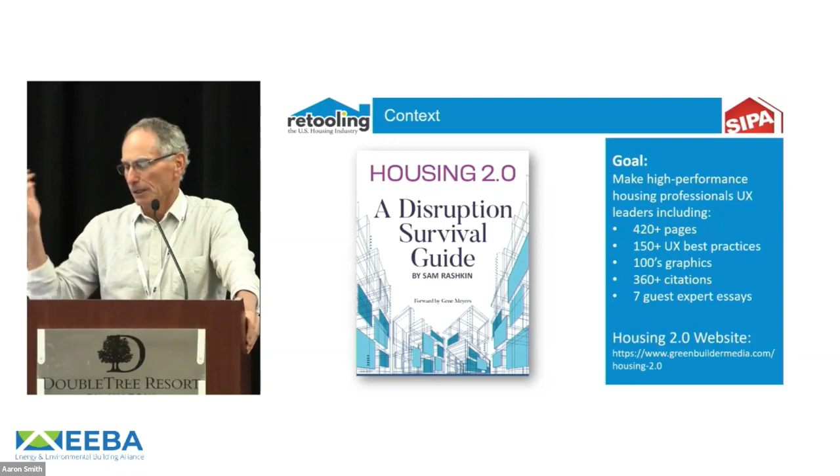It's over 400 pages. It's got hundreds of graphics. The first book I wrote had 60 citations. This one has over 360. It's a lot of research, and it's a lot of guidance on how to do high performance better, for less cost.

So the outline of what we're going to cover is we'll look at the power of innovation. Innovation is transformative, done right. And then we'll look at high performance home enclosure innovation and suggest maybe it's time to rethink it. Then we'll look at the next part, the challenge, getting that high performance home enclosure innovation to the market. It's great that it's better, but there's still some unique challenges you have.

And then how we're attempting to look at it with structural insulated panels to communicate that innovation at the point of bidding to a builder in a more effective way of translating the value. And Jack's going to give you the state of the SIPs address about all the new and amazing things they've done to make SIPs more accessible. So that's what we're doing. And let's start with the power of innovation.

And I always like showing these slides because they're so effective at showing innovation absolutely in front of your eyes in a way that it's hard to show. So you had two forms of personal transportation at the turn of the century, 1900s. You could either use a horse and buggy, or you can use this newfangled thing called the automobile. And if you want to know which one won out at the time, just look at a picture of New York City, 1903, Easter Day Parade, Fifth Avenue.

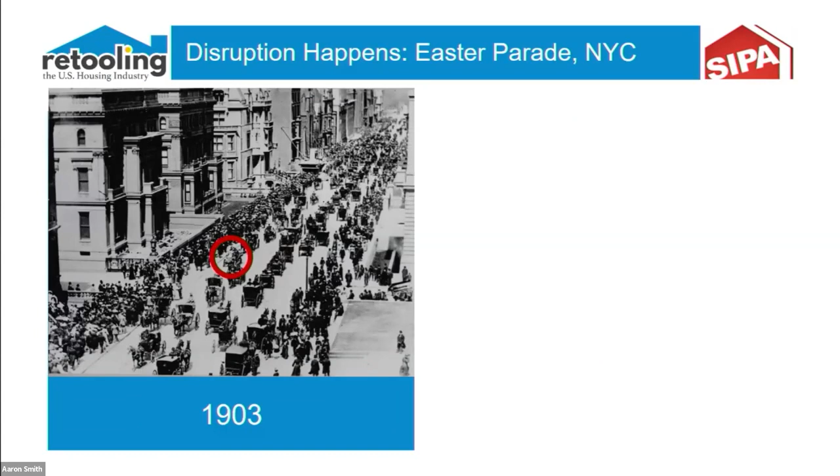And the Where's Waldo question is, where's the automobile in a sea of horse and buggies? And I'll highlight it for you right there. And so it was clear that for some reason, even though you had two options, the predominant, almost singular option that was chosen by consumers of transportation were horse and buggies.

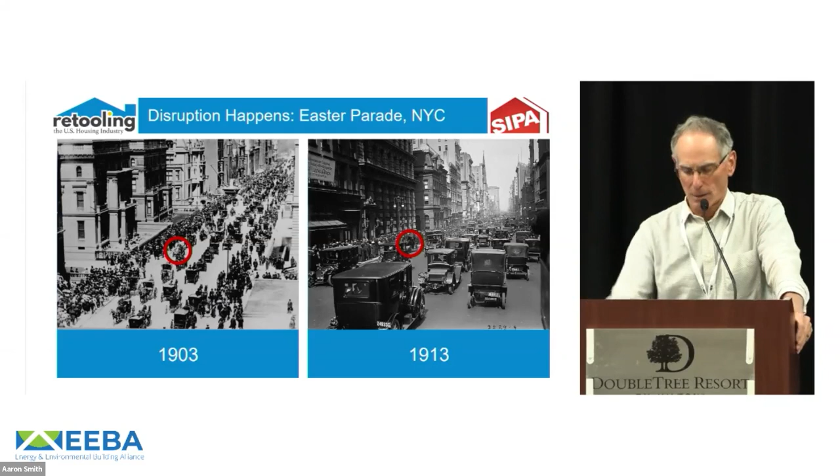Fast forward 10 years, 1913, Fifth Avenue, Easter Day Parade, the exact same street, a picture 10 years later, and you flip the question to where in the sea of automobiles is the horse and buggy? Right there, and everything changed. And why did it change? Two conditions are in play.

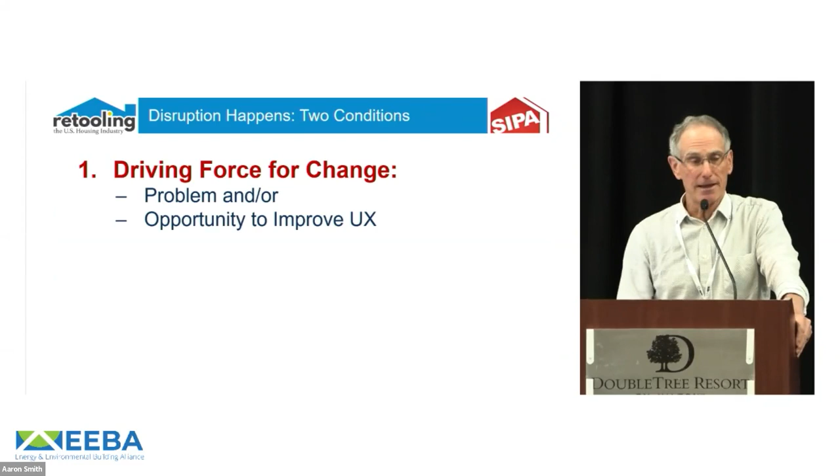First is you have a driving force for change. It's either a problem that needs to be solved and or an opportunity to really transform user experience. And then the second thing you need, here's where the innovation comes in. You have an innovation that's a solution to the problem and or this amazing new user experience. Something like that happens, and it happens on steroids when the problem transitions to become a crisis.

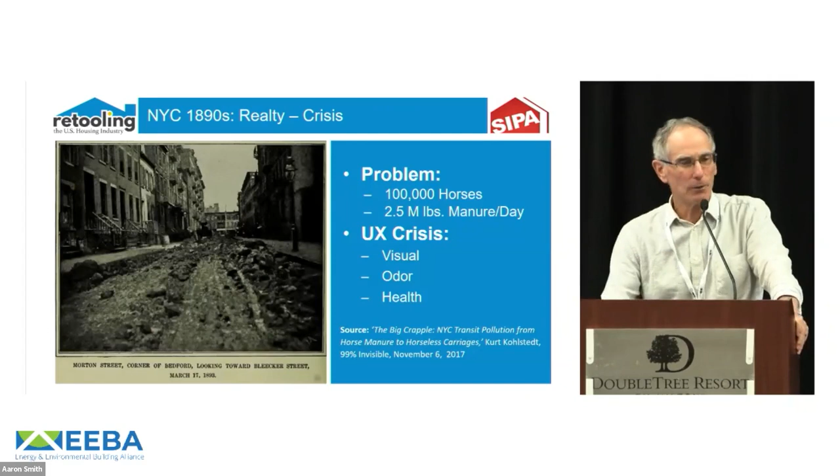This is actually what was going on virtually in all big cities in Europe and all big cities in the US. You had a massive crisis, an environmental crisis of the time. In New York City's case, the problem was you had 100,000 plus horses producing over 2.5 million pounds of manure, probably the same amount of piss as well. It was just a nightmare. And you see this image from one of the newspapers at the time. And the result was living in cities was a horrid experience, visually, odor, and epidemic health issues that were going on. And so, clearly something needed to be done.

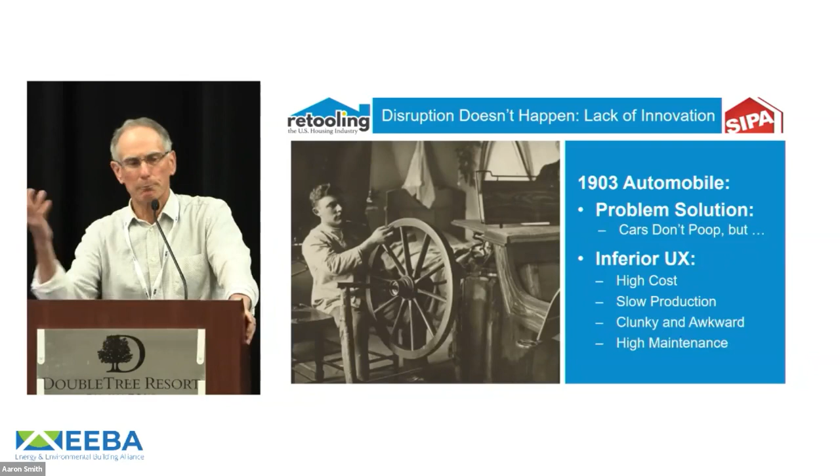Unfortunately, the alternative at the time, the 1903 automobile, sure, the automobile doesn't poop. We got that covered, but the user experience was horrible. It was really high cost for cars. They were cobbled together in a back room somewhere where a single person would put together the parts, and it was slow, clunky to use and awkward to drive, really high maintenance. If a part failed, good luck trying to get it fixed. It wasn't ready for prime time.

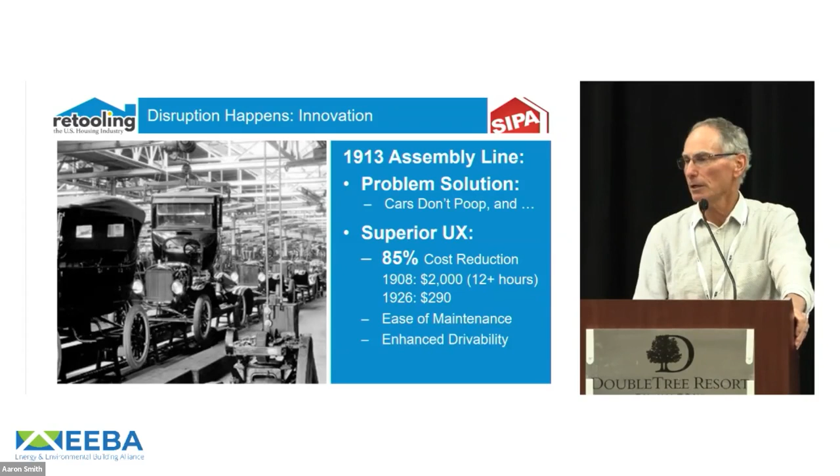And you all know what happened by 1913, the assembly line kicked in. That was the innovation that makes it happen. And so, yes, cars don't poop, and cost dropped 85%. The maintenance with all the standard parts and all the infrastructure to provide the services that you need, the enhanced drivability with a completely engineered, mass customized solution. In fact, you can get any color you wanted as long as it's black, right? There you go. We completely transformed the market.

So my key point about innovation is if you wait too long, if you don't adapt, you're left behind. So think of all the poor veterinarians and horse caregivers who were just left out of work. All the horse exchanges no longer had any business. All the horse and buggy companies that completely had to shut down. All the stock feed companies that lost business, the stables, the horseshoeing and jobbing businesses, and then the poor workers who were running around the streets cleaning up the mess.

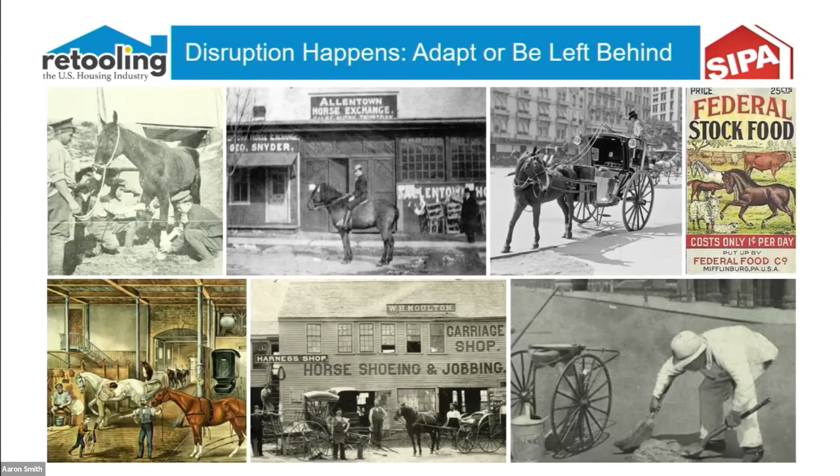All those peoples were disrupted. And that was only part of the disruption, right? All the services around all those businesses, whatever shops and other services tied to it, all of that suffered if you didn't see this coming. And now we know we have the next disruption going to happen, right?

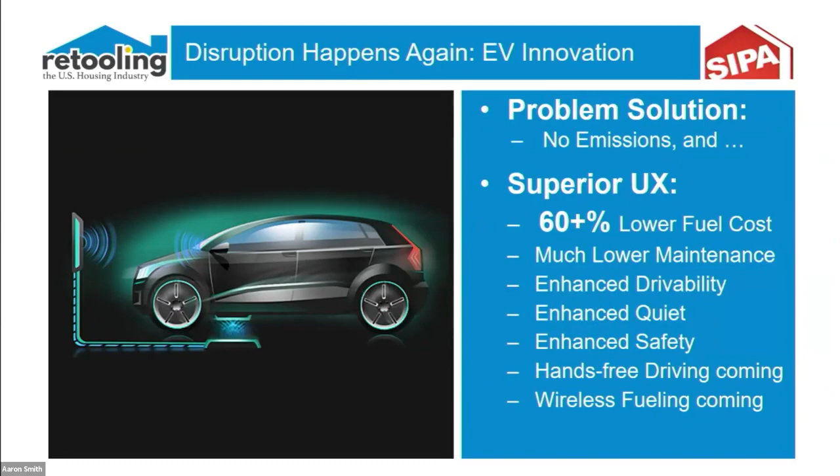Because now the new issue with cars is they emit carbon dioxide and emissions. And now we have a solution. Electric vehicles don't have emissions, and they have this incredible user experience, 60% lower cost for fuel, much lower maintenance, amazing drivability. Like they're on rails when you have those batteries all the way low and centered. Driving those cars is a completely different experience. The acceleration, the quiet, the safety.

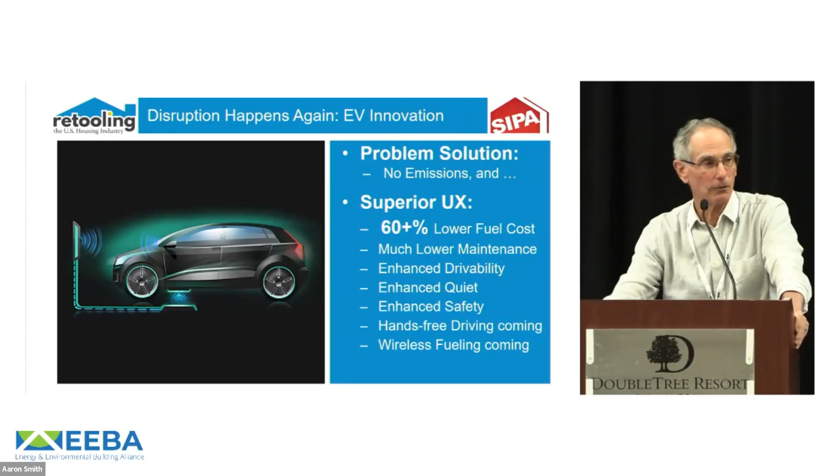The self-driving cars are coming. And then very quickly, we're going to see wireless charging. Just drive right over the charger, much the way your cell phone goes into a wireless charger. Amazing, better experience. But of course, in the future, we're going to have to worry about landfill and all the batteries that come from these millions and millions of cars. But that's what happens. Things disrupt when you have a solution to the problem and an innovation that addresses the problem and improves the experience.

So I'm going to suggest disruption is going to come to housing. And over the next 3 to 5 years, you're going to see some amazing changes. The reason I asked how many people raised their hand for who were here at the last session, Danielle and Jesse Younger, and what they're doing with this project with DigiBuild, Lago Place near Austin on Lake Travis. That's the whole shooting match. No, that's everything we're pointing to. It's going to address all these crises.

There are 5 crises that are just hammering the housing industry. It's the lack of user experience readiness. It's the affordability, productivity, the lack of being digitized. It's going to address all these crises that are converging by applying all these new innovations. It is an absolutely user experience optimized community. It's an absolutely user experience optimized house. It has fully optimized performance. It is fully digitized. It's mass customized.

If you're not relating to some of these terms, you really need to go back and watch the recording about that project. That's the future. And so as a result, when I connect dots, I make this prediction that's the future with certainty. Okay, so now I'm going to suggest in this room, I want to focus on the enclosure. I think that has to transform as well.

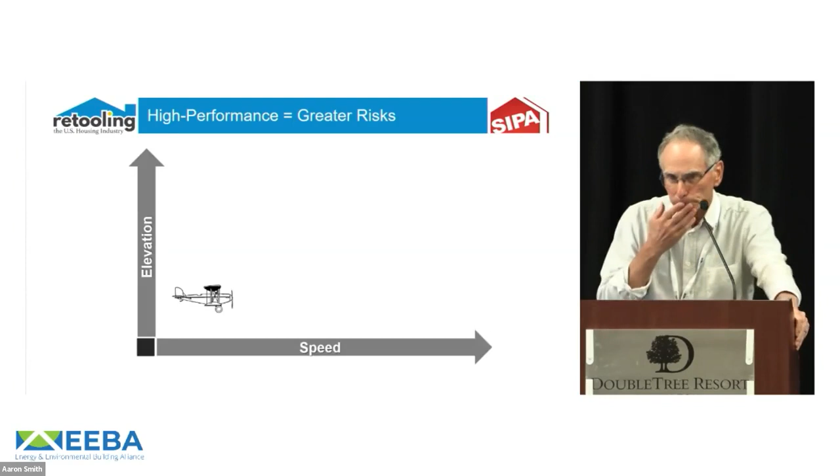It's just amazing. So what I want to bring to bear to understand the value of going to innovation is to understand from a building science perspective, all the risk we manage when we go to high performance enclosures. Risk comes along for the ride anytime we ratchet up performance for any product. When you make it higher performing, usually there are a whole associated set of risks that you have to manage.

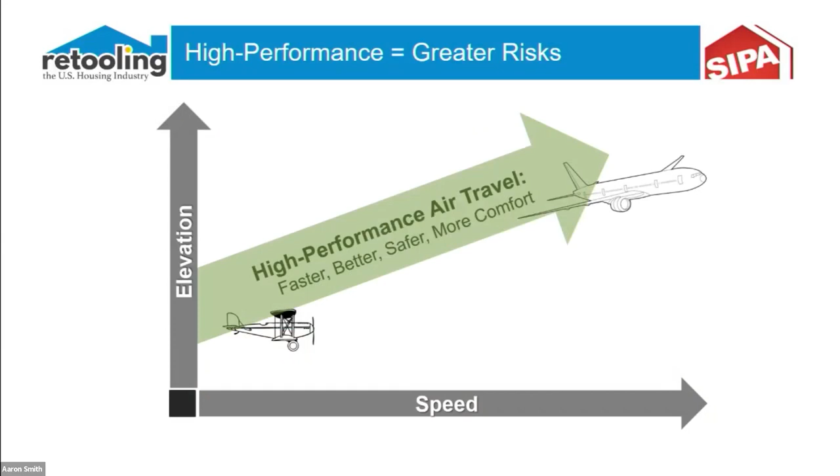By example, I can show you that when we started with airplanes and they had open cockpits, they flew at low elevation, which is the vertical axis, and very low speeds, which is the horizontal axis. And then we said we want to make them higher performing. So you look at new modern jet transportation, it flies at 35, 40,000 feet above elevation. It flies at 500 miles per hour. So we added all this performance that makes them faster, better, and more comfort, but we took on amazing risks.

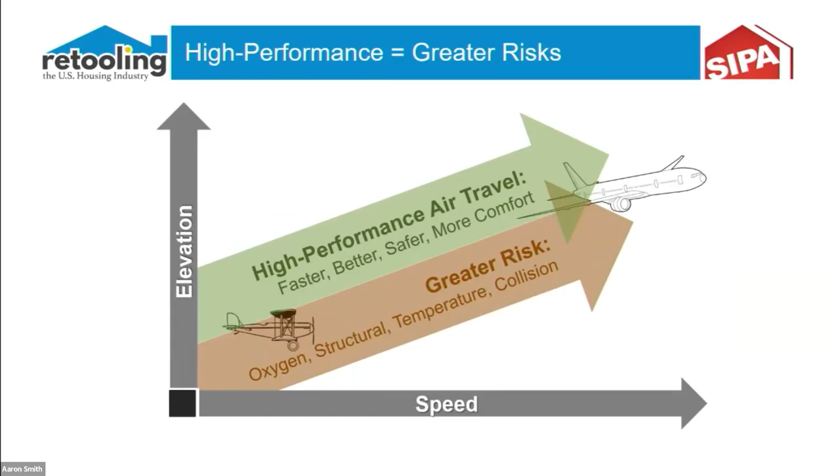We had almost no oxygen at 35,000 feet. So we don't not fly at 35,000 feet, we manage the risk. We have pressurized cabins and oxygen masks and so forth. We have 150 mile per hour winds and turbulence, so we build stronger frames and lighter frames. We have minus 70 degree Fahrenheit temperatures at 35,000 feet, so we have much more insulated enclosures for the cabins, and we have much more risk of collision with thousands and thousands of planes flying around at 500 miles per hour. So we have radar detection, collision avoidance, all these automated controls.

We manage the risk for high performance air travel. I forget the number. I just researched the number of airplane accidents in the last 20 years or so, and it's like 1/400th of what car transportation are in terms of number of deaths per mile traveled. It's just a stunningly safe form of travel. We can manage risk. That's why we do it.

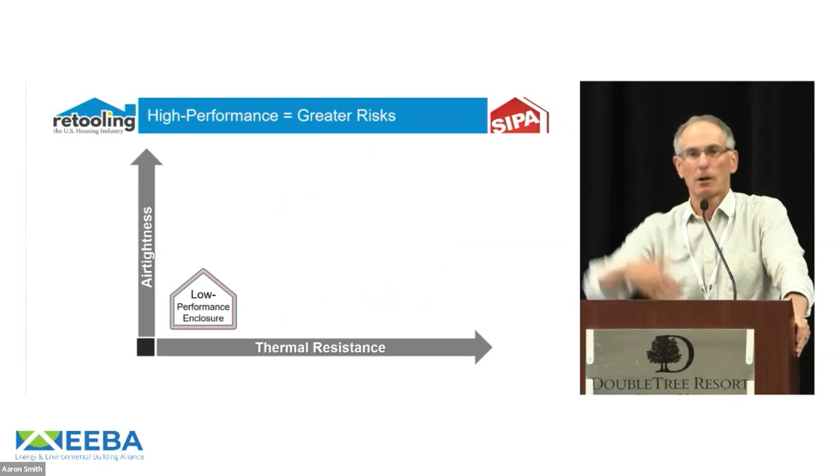So what about high performance enclosures? So a low performance enclosure, the axis vertical and horizontal change, the air tightness on the vertical and the thermal resistance on the horizontal. So when we have a low performance enclosure, we have low air tightness or high air leakage, and we have low thermal protection.

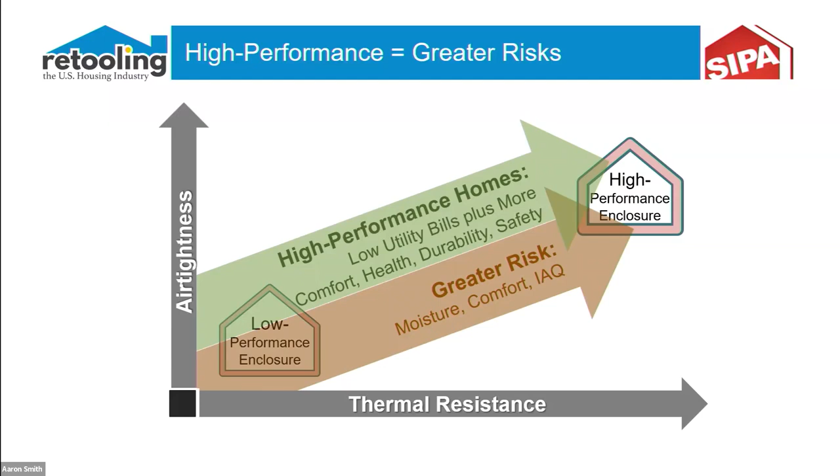But of course, we're going to go to high performance enclosures, right? Low bills, more comfort, health, durability, and safety. It would be insane not to do a high performance enclosure. But we have greater risk when it comes to moisture, comfort, and indoor air quality. So we do not avoid high performance enclosures. What we do is we manage the risk. So let's look at why the risk happens, what we do to manage it.

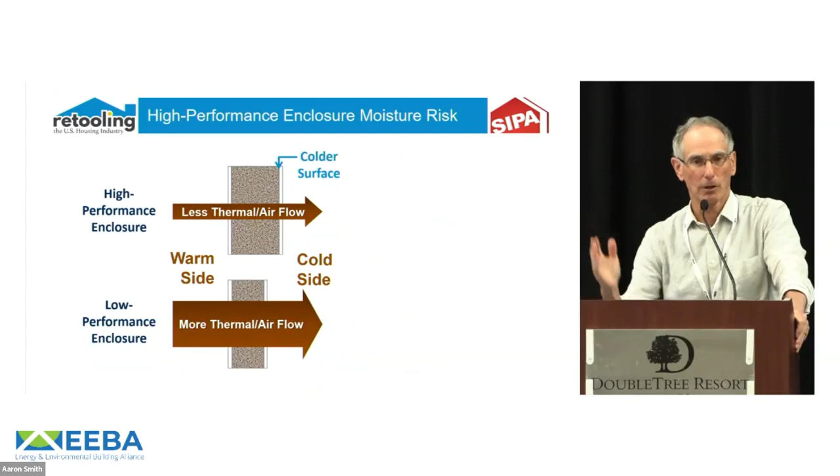So if it's a low performance enclosure, basically we have a lot of airflow and thermal flow going through the enclosure. If it's high performance, the one on the top, we have a tremendously reduced amount of airflow and thermal flow going through the enclosure. What that means is we have a much colder surface on the inside of the cavity on the cold side of the assembly. That's just logic, right? We're stopping the thermal flow from getting to it, it's much colder. We're stopping the warm air that leaks through from getting to it, it's much colder.

So look at the risk. We have more wetting potential. That surface now is going to condensate much more quickly because it's much lower temperature, and we have less drying potential because we have less thermal energy getting through the assembly that can dry it out if it gets wet. We're doomed in a high performance enclosure if moisture can get in. It cannot dry anywhere near the way a low performance enclosure used to.

The reason we can't retrofit 80 million existing homes by throwing in wall insulation is now we're creating a cold surface when we do not have the control layers to manage the moisture flow. And we'd be adding tremendous risk just by blowing the insulation in an existing home. We can do this in new homes because we can manage the risk, we can do our control layers. So that's what we do.

We do the building science control layers. We do HVAC best practices to ensure that we're not having air leakage in ducts that can create problems, and we're managing humidity indoors better. And we have ventilation to dilute humidity indoors as well. So we just know how to manage the risk, and then of course we do it.

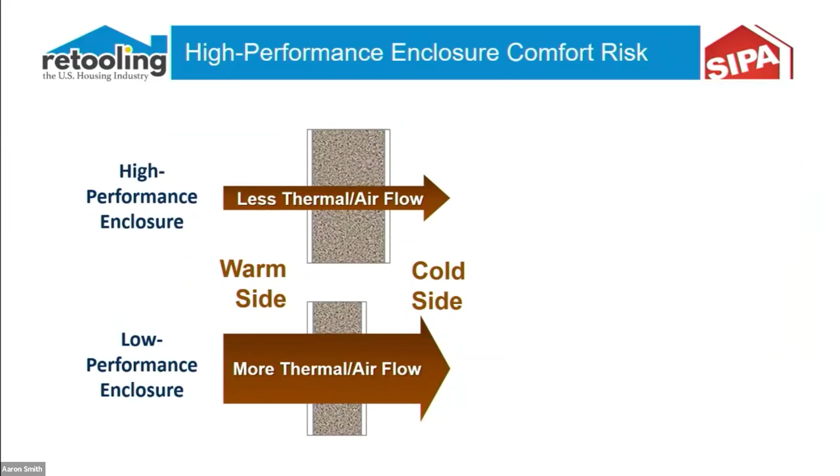The same thing when it comes to comfort, we have to realize that we have this new reality in high performance enclosures. They have ultra low heating and cooling loads, incredibly low, a tiny fraction of what they used to be. And therefore we have more risk. The risk comes from the fact we have less airflow going through the comfort system, right? The ducts have much less airflow. We hardly engineer the ducts with diligence. The industry just doesn't really spend nearly enough diligence on the duct design.

We have shorter cycles to get to the cooling when the loads are so small. So the cooling coils are not getting cold enough, long enough, the way they used to, to remove as much moisture. So what are we going to do about the latent load? And further with the latent load, we have these swing seasons that are so much longer on the front end and the back end when we don't have sensible cooling, but we still have humidity loads that require latent load to be managed. All this additional risk in a high performance enclosure.

So what do we do? We do variable speed systems that can throttle down more effectively. We do HVAC best practices where we have quality installation. We have ducts that are actually designed properly and have the right airflow and get the comfort to the room, even if it's a small amount of airflow. We have new innovations like plug and play ducts. We have dehumidification now as a must-have. It's not an extra credit any longer.

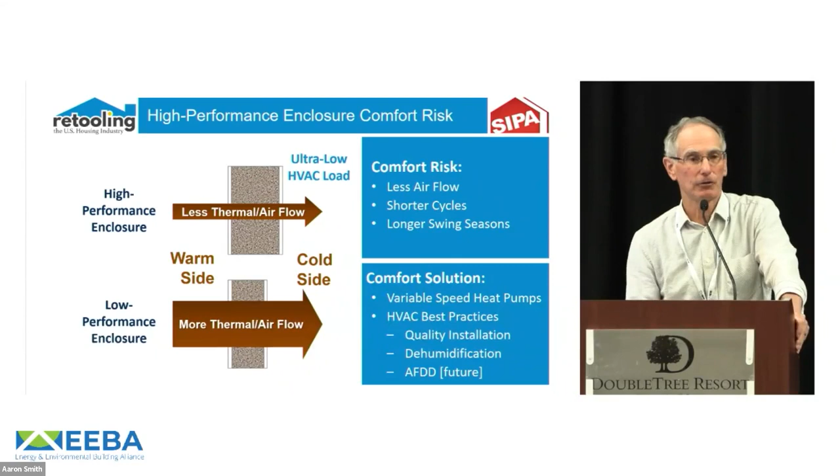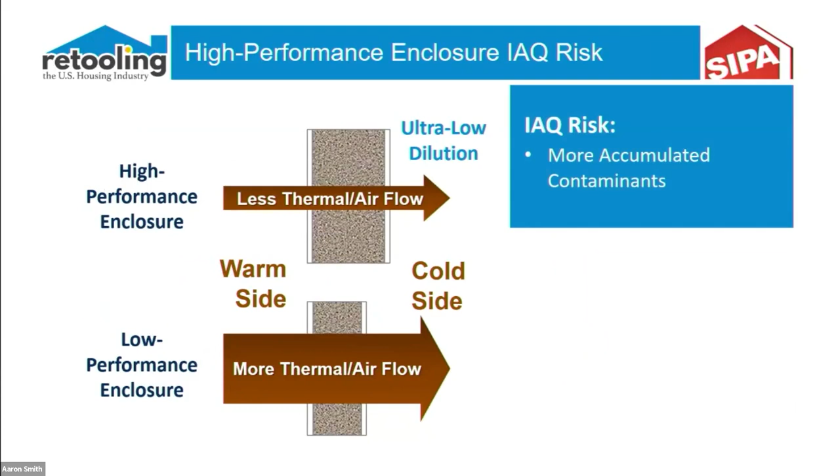And in the future, we'll have automated fault detection and diagnostics so we can manage and get ahead of any issues that may be happening with the HVAC system. Then on the IAQ side, we have this ultra low dilution since we have so much less air leakage. So that means we have greater risk with the contaminants that accumulate from all the ones we bring in, whether it's the furnishings that have fire retardant chemicals, whatever chemicals are involved in building materials, carpets that accumulate dust, the moisture that's generated indoors, cooking, cleaning, washing. We have all these contaminants, so we have to manage them.

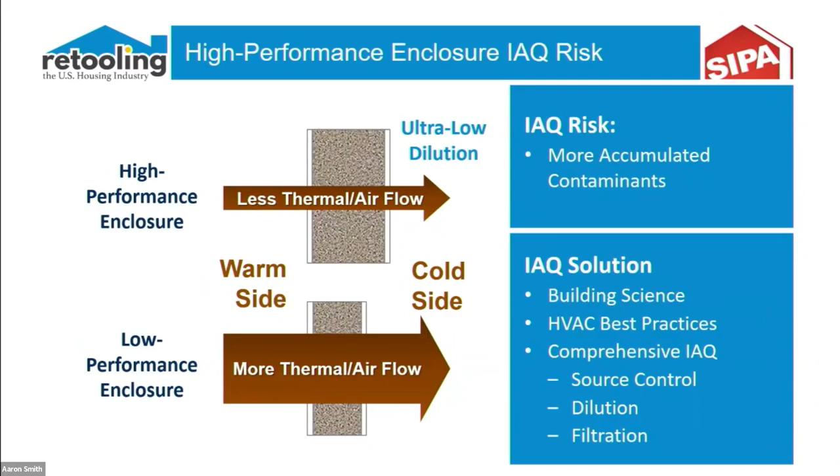We do comprehensive building science again to control the airflow that will introduce external contaminants like pollen, dust, humidity. We have HVAC best practices to ensure that the ducts are airtight and can't introduce contaminants into our home. And we have comprehensive indoor air quality like Indoor airPLUS that has source control, dilution, which is ventilation, spot and whole house, and filtration. We manage the risk.

Okay, and then future ready. By the way, when we do all this we have homes that are ultra durable. They should last for hundreds of years versus much shorter times. So we should manage the risk that they will stand the test of time, that they're future ready. And therefore we have to realize that we have much more propensity for disasters. The frequency and the magnitude of disasters we're watching every year is mind-blowing. I think we had six 1,000-year rainstorms in a 6-week period this year. We have to recalibrate what is a 1,000-year rainstorm, right? Don't we? We have much more.

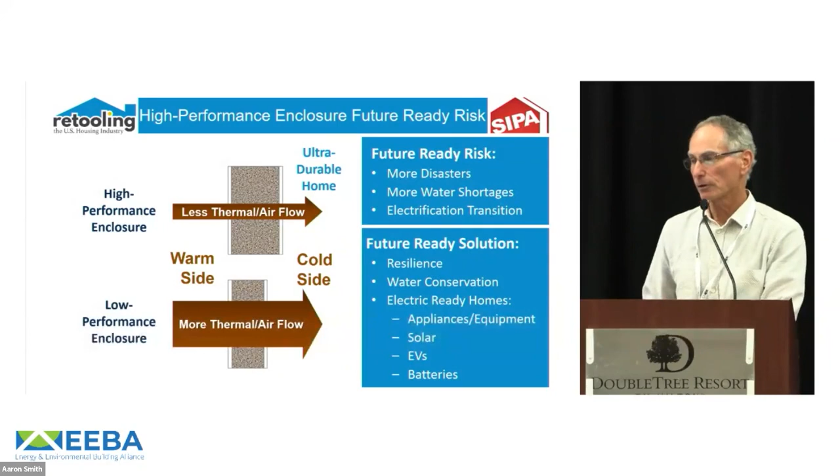The water shortages are historic. You know, we've been hearing about Lake Mead and just the whole western region of the country. What are they going to do about water? And we know that we're going to all electrification. We've heard that many times today. So we manage that risk by integrating resilience, both pre and post events, and water conservation in drought-prevailing locations.

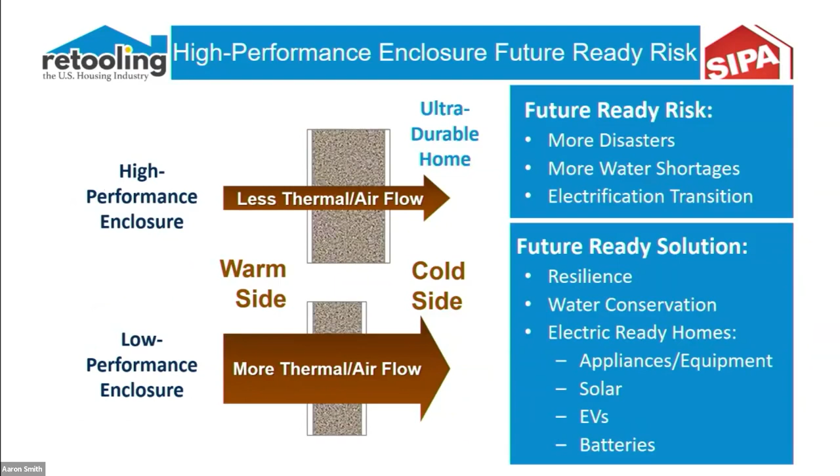And we think about electric ready homes. You know, we have solutions if we do include fossil fuel appliances or equipment, where we have the electric connection ready to go. Solar ready is already part of Zero Ready Home. Electric vehicle level 2 chargers and battery ready solutions where we can bifurcate loads that are critical, have the switches and so forth. All this we know we need to do.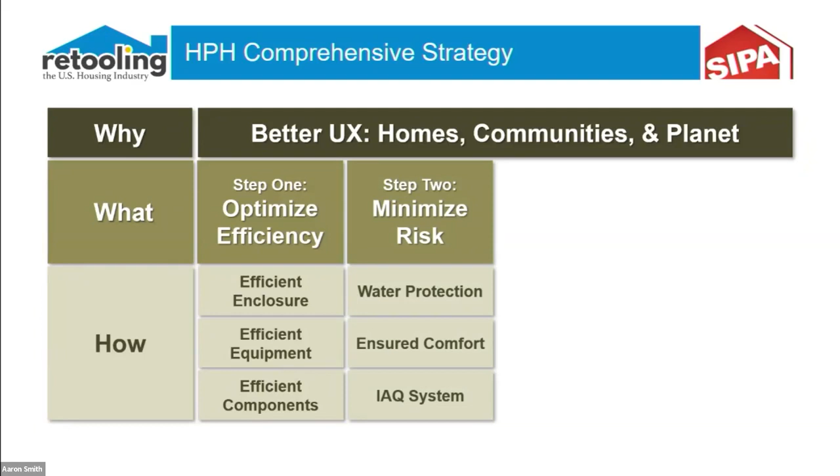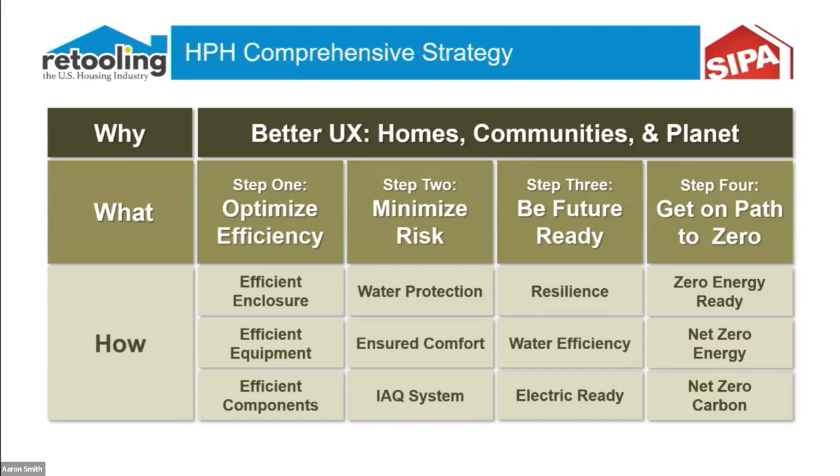Step two, now we have all these risks that we take on with a high performance enclosure. They become must-have. The building blocks for water protection, because we have no tolerance if we get wet, ensured comfort with really diligent best practices for HVAC, and a comprehensive indoor air quality system. Then we're future ready: resilience, water efficiency, and electric ready. And finally, we're getting on the path to zero carbon: zero energy ready, net zero energy, net zero carbon. You can pick your step where you want to be, but start getting on that path.

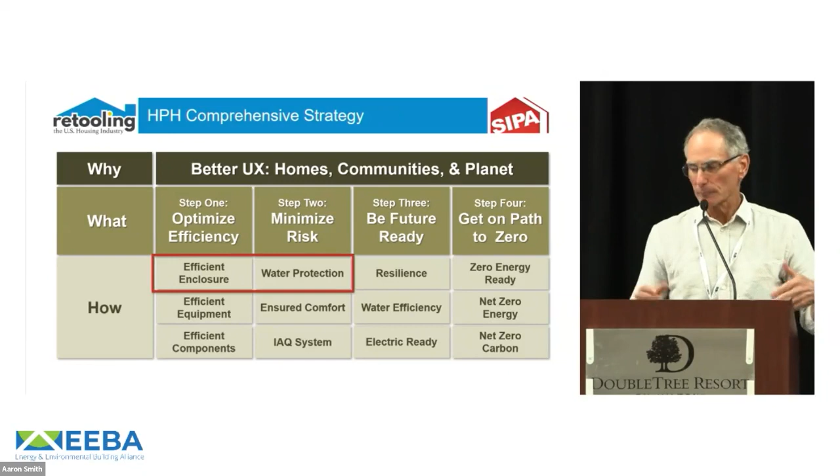And what I want to focus on today is these two key parts. These will take you down in this whole system of building blocks for high performance homes. If you don't get the enclosure right, you can't replace the enclosure. And if it's not water protected, you can't fix it as well. So let's understand all the forces that we have to act on, and then see if you agree with faster, better, cheaper.

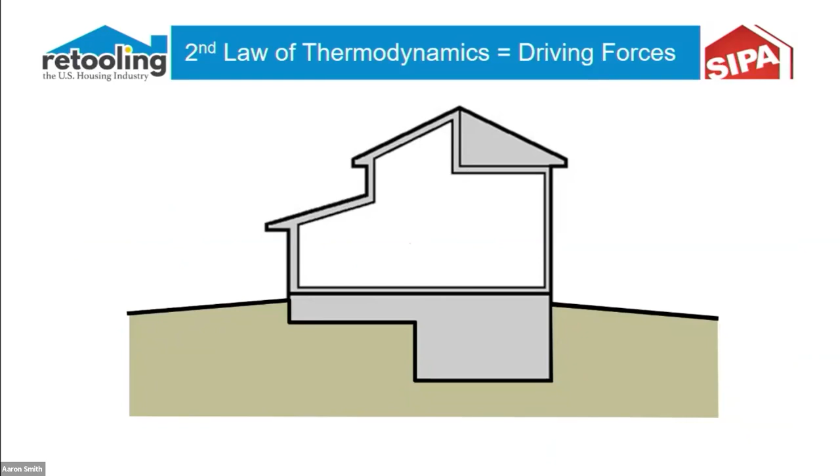So you all understand the basics. The second law tells us that we know the direction of flow. Everything goes from more to less. So higher air pressure wants to go to lower air pressure, and heat wants to go to lower heat, and higher moisture wants to go to lower moisture. We know the direction. And we also, therefore, see how that impacts our homes and the enclosure. For airflow, we have outside wind; higher pressure wants to get inside when it's lower pressure. Soil gases below grade that might, let's say, carry radon, want to get into your basement when it's lower pressure inside the basement.

Inside the home, stack effect is putting this constant pressure right up against your attic at all times, and fans like clothes dryers and exhaust fans and clothes washers, all those exert and create negative pressures in our home. And then when it's hotter outside, it wants to get inside. When it's hotter inside than outside, it wants to go from inside to outside. We know the flow. And then bulk moisture wants to get inside where there's less bulk moisture, and moisture vapor wants to get from outside to inside, whether it's in the air or in the soil gases below. So these are all the forces that we have to manage.

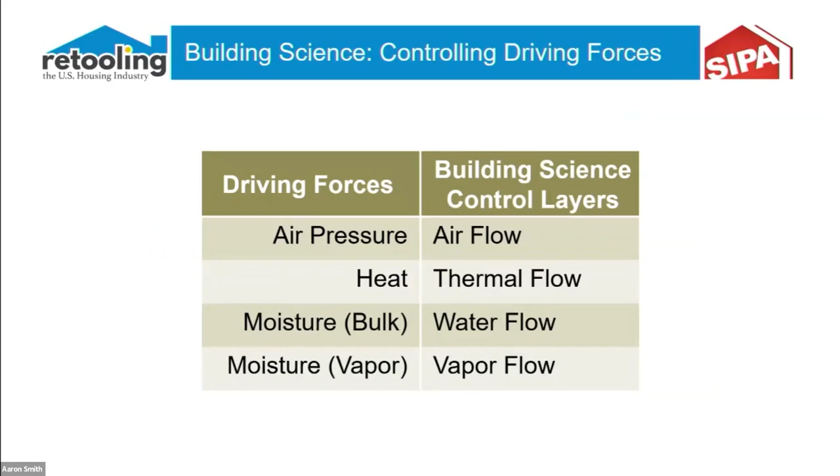So building science is essentially 4 control layers to manage all those risk factors. We have the airflow control layer, we have the thermal flow control layer, we have the water flow control layer, and the vapor flow control layer. That's what building science is. Joe Lstiburek's book says moisture is the absolute most important part of building science. So it's the moisture control handbook. That's why it's called that. But it's really a building science handbook, how to do all these 4 control layers.

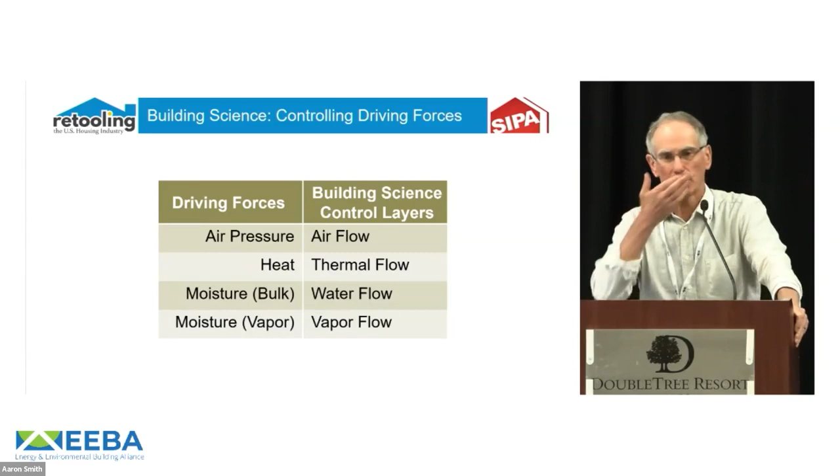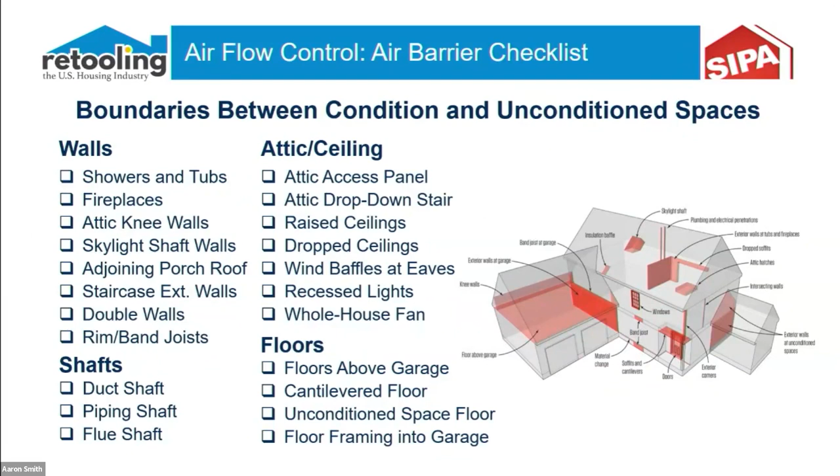So your first and most important air control layer is the air barrier. This is a checklist of air barriers that you need to have. Essentially, this is the thermal bypass checklist we developed for the Energy Star Certified Home Program, version 2. And you've got to have them at all these locations. I'm not going to walk you through these. There are lots of air barriers, and this checklist is critical because if you get it wrong, it will completely undermine the thermal performance of the enclosure.

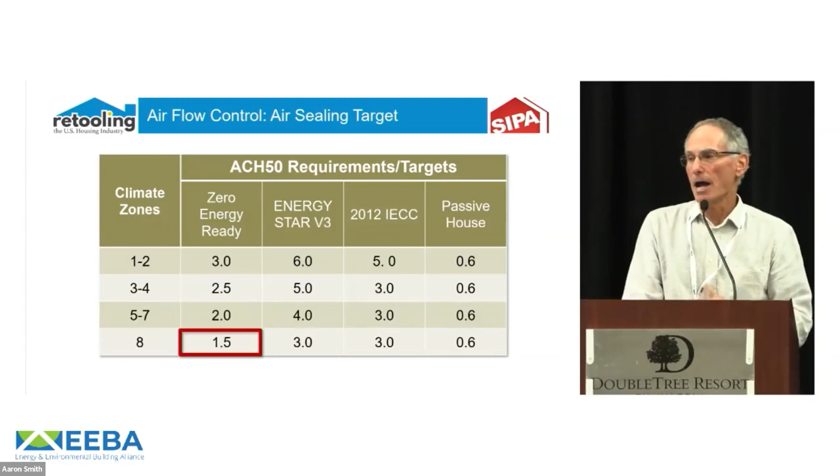Then on airflow control, air tightness, these are all the targets for different programs by climate zone. Zero Ready, Energy Star version 3, 2012, IECC 2015 is the same, Passive House. So you have these ACH 50 targets. It's way too complicated. Let me make it simple for you. Everyone should be 1.5 or less, every climate zone. This is absolutely insane to go higher. We can build enclosures that are airtight, if for no other reason to keep dust, pollen, moisture out of our homes, even in hot, humid climates and in cold climates and all climates. We've got to build to 1.5. So you've got the spaghetti of different targets. I believe, particularly when we use the better enclosure systems, 1.0 will soon become the target.

Then it comes to how do we get to that target? Well, in typical construction, these are your usual suspects. This is the checklist for air sealing. You have the penetrations, you've got half a mile of cracks around windows, doors, and all these other key points. And then odd geometry creates all sorts of air sealing challenges you have to manage. One of the reasons I advocate simple is the geometry is really tricky in the field, but that's a separate issue. So there's your air sealing checklist. I'm not going to go through it. We know these. But again, if you get air sealing wrong, this is the ultimate building science way to a building that doesn't work. If in real estate it's location, location, location, in building science it's air control, air control, air control. That's where you have to be.

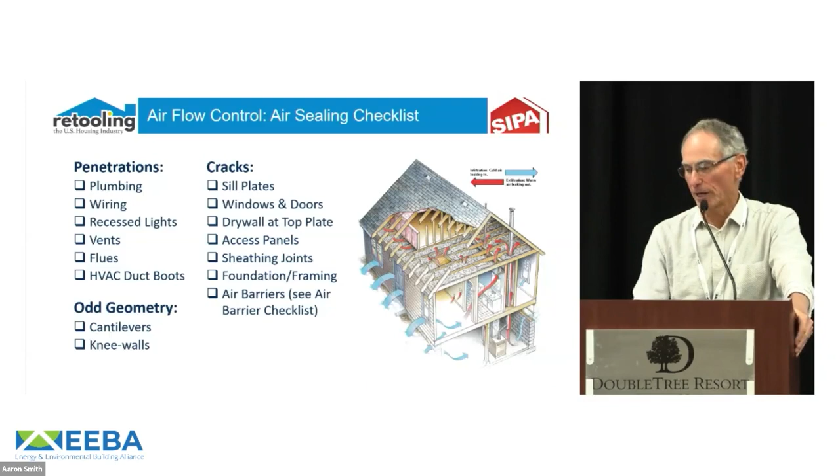And what's interesting is the most egregious interface, the one that is going to have the most potential exposure to risk, is the attic ceiling interface. The delta T across the attic ceiling interface is greatest because in the summer, I'd assume in Phoenix today, your attic's running at least 160 and you're 70 in the home, you're looking at a 90-degree delta T. In the winter, the attic will be about the same temperature as outside. So it's the worst delta T you have. Then you have the stack effect, it's constant, like 5, 10 CFM pushing right up against the attic. And you don't want any potential for warm air to hit a cold surface.

And you have all the air barriers we talked about. We have all the air leakage checklists we talked about. The attic is like Swiss cheese, basically. You have duct boots, you have penetrations, you have hatches, you have recessed lighting, you have dropped and raised ceilings. I mean, it's just the worst when it comes to the number of penetrations and cracks. Just the drywall where it interfaces the top plate is hundreds and hundreds of feet of crack that you have to basically seal.

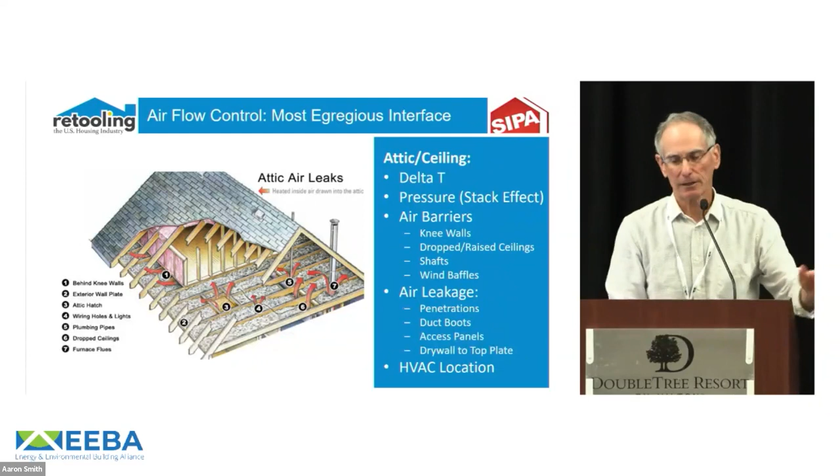And it's a very difficult seal. And then, of course, somehow the insanity of putting the heating and cooling system, equipment, and the ducts in the attic that's unconditioned is something we've got to shut down. That just doesn't make sense in any climate. So this is what we have to watch the most.

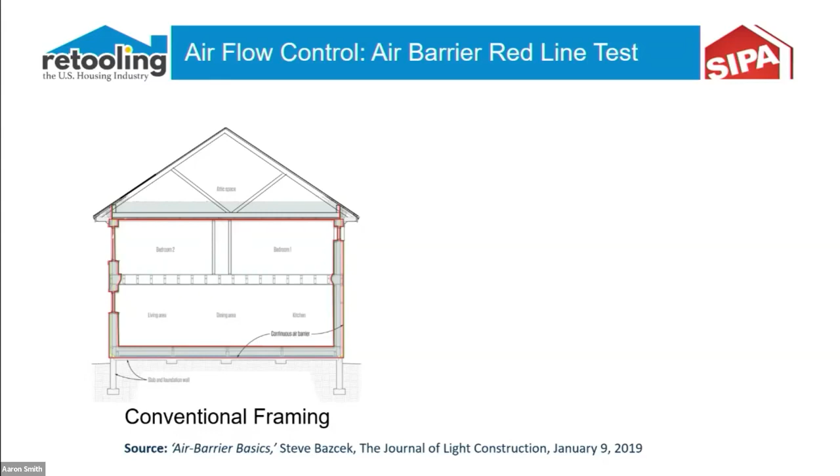And then when I do the red line test for air barriers, this is a typical house with a vented attic. In a red line test, you basically draw a line on the air barrier and never lift the pencil up, to make sure you have the complete air barrier. And notice the inside air barrier is fine, but my exterior air barrier has got a problem. Oops, we have no air barrier on the top side of the insulation.

And I'll tell you, I installed 24 inches of cellulose in my attic right after I moved in. And when I went back up there 10 years later, it was down to less than half, compressed down. And when repair people go in for cable or whatever, they walk through it. Your fluffy stuff in the attic is really difficult. The reason the codes require levels to be so high is because it is such an egregious interface. And then we stick the heating and cooling up there. What are we thinking? So I'm going to submit.

It's time to stop the insanity. We have to go to unvented attics in virtually all climates. It's just going to be a superior user experience, right? All the added volume for MEP, for living space, for storage, whatever you want to make it. And then you have more comfort, because instead of having a 160-degree temperature right above me today in a Phoenix home, I have about an 85-degree temperature right above me. And the drywall surface temperature will be a whole number of degrees cooler, and surface temperatures dominate comfort.

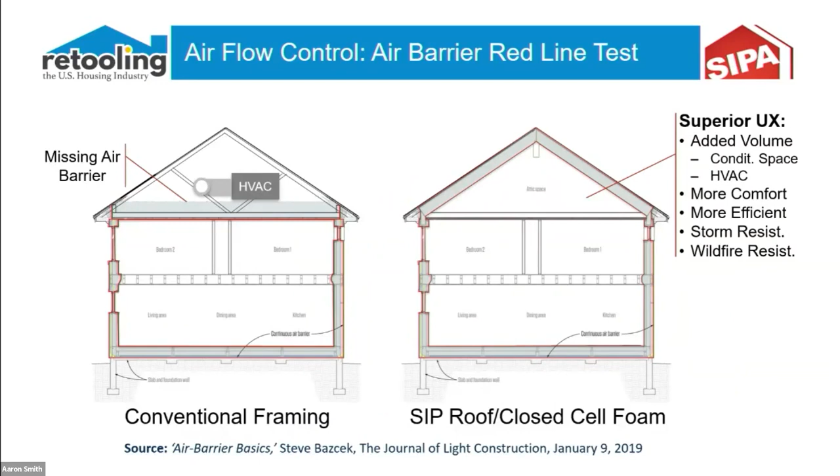And then I have more efficient performance. I have greater storm resistance, because if I have a vented attic and the air can get through the vents and create pressure in the attic and blow up the whole framing structure, that's greater risk. If embers during wildfires can go through the vents and ignite the framing, that's greater risk. Unvented attics are far more resilient. The only issue would be in cold climates with severe winters and snow accumulation, where icicles at the edge and ice damming would be a greater risk. So you put an air gap between the top sheathing and another sheathing layer for the roofing.

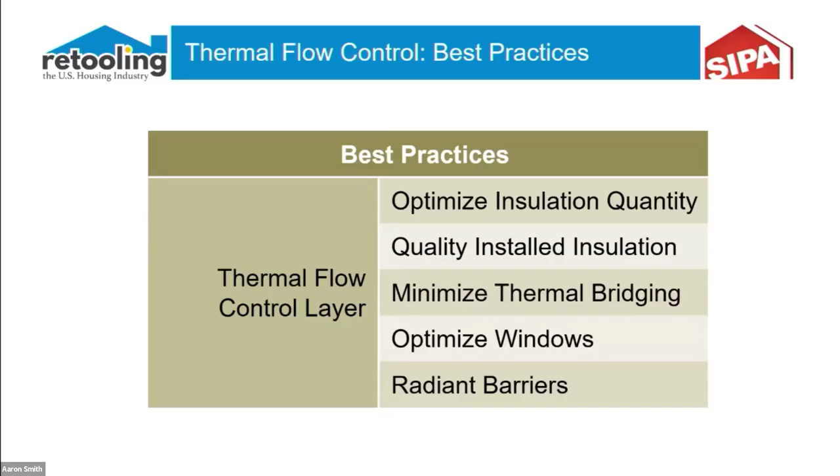Okay, then comes thermal flow control. The best practices are basically you've got to get the right quantity of insulation, the right quality of installation, and then minimize thermal bridging, really good windows, and radiant barriers, which really factor in with low-E windows for the most part. But the big focus, the real thermal performance killers, are your quality of insulation installation and thermal bridging. Those are not forgivable.

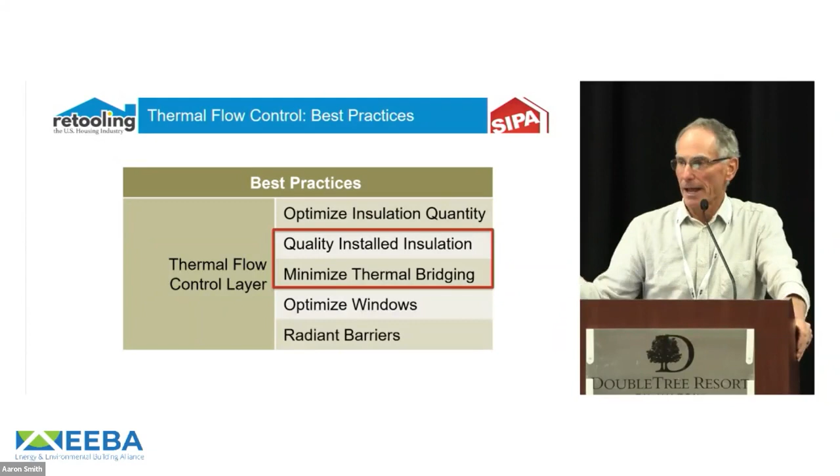And when we take a thermal image of a home today, you're going to have greater accountability. Cameras that used to cost $30,000 cost $500 or $600, and they are emotional, immediately understood ways to expose defects in the thermal enclosure. You have to get them right. And even if we're reasonably okay, where you don't have major defects, just the framing alone is far too much thermal loss with conventional framing.

And just to give you the numbers, with conventional framing, about 25 to 30% of the wall is just contiguous wood, so your R-value is 3.5 to 5.5. If I go to advanced framing, I'm almost at a 20% framing factor, so about 1/5 of the wall is R3.5 or R5.5, let's say with 6-inch framing. If I go to staggered studs to minimize thermal bridging, I'm still at 12%. Double wall framing is still 10%. SIPs will get you to 5%. Insulated concrete panels will do even better. And rigid insulated sheathing with continuous outboard insulation will get you to 2%.

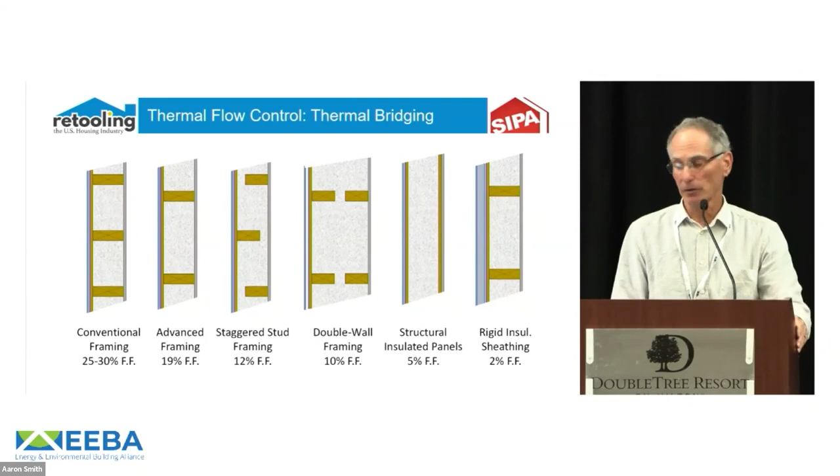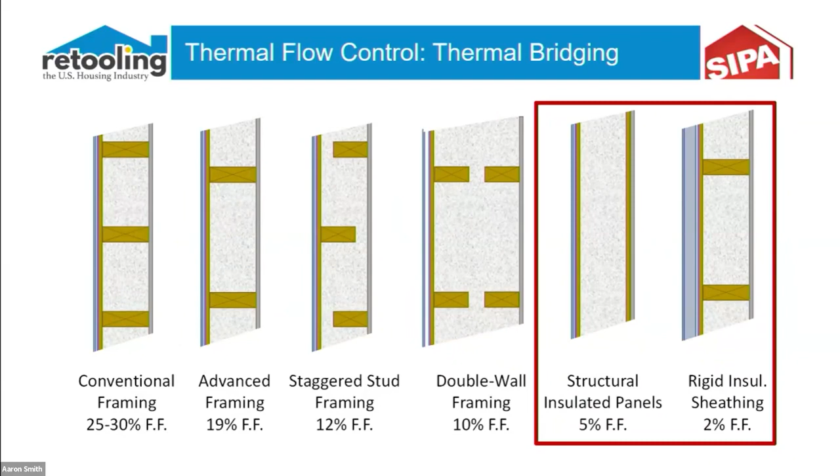I'm going to say the time is up. Every home should be built with 5% or less thermal bridging. There's no excuse. Even with advanced framing, that's just too much thermal bridging. So this is what I want to emphasize. That's where everyone should be.

And you also have to have militant control of air leakage when it comes to moisture control and moisture risk, because look at the impact that just a 1-inch hole has on a 4x8 piece of drywall in both hot-humid and cold climates.

In a hot, humid climate, if we have a 4x8 sheet of drywall with a 1-inch hole, we have 7 quarts of water pass through during the cooling season. And without the hole, only 3/4 quart passes through. So it means 10x greater vapor flow goes through when we have a 1-inch hole than just with diffusion. That's a huge amount of risk in a hot, humid climate.

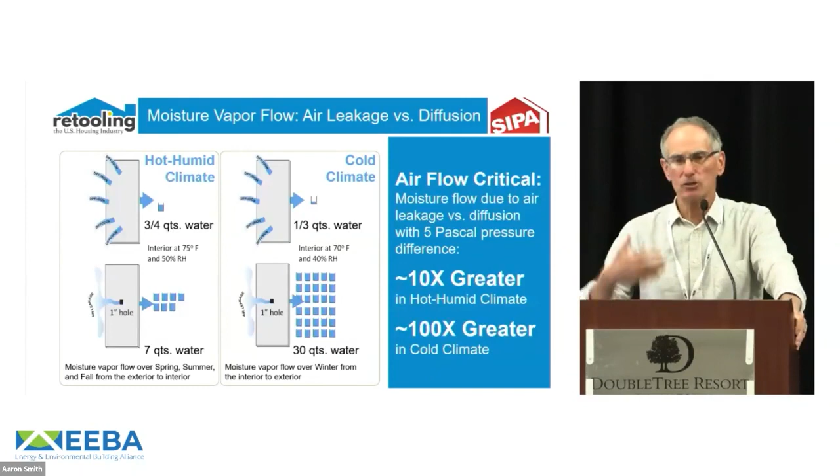In a cold climate, it's 100 times more vapor flow, airflow going through a 4x8 sheet with a 1-inch hole than without. You have no drying potential, and you have all this wetting potential. Again, air leakage, air leakage, air leakage. You need a really comprehensive air barrier assembly.

So that brings me to faster, better, cheaper, right? I just go out of my mind when I look at the risk we take on with conventional framing, thousands and thousands of pieces of wood and nailing and details. And when you have just a simple set of panels that have probably 1/5 the amount of wood, probably double the strength, and you don't have to spend weeks doing the framing.

It's faster framing. The air sealing is just the panel joints that have to be sealed, and then the plates have to be sealed on top and bottom. Hardly any air barriers, hardly any attic venting. You have drywall going up faster. You don't have to line up with any framing. You can go wherever it takes because you have a nailing surface contiguous on all the exterior walls. So you have less waste and less time installing drywall and trim.

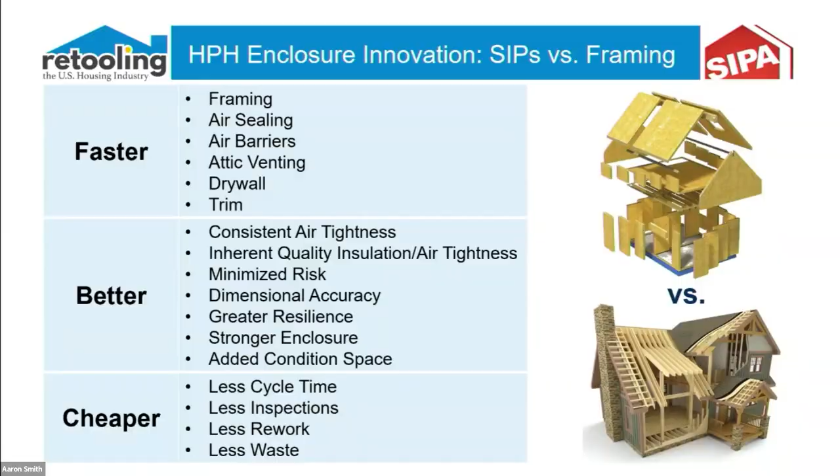And then it's better. It's consistently airtight. Consistently 1 air change per hour or lower is the numbers I'm getting from the best SIP manufacturers. Inherent quality insulation, amazingly airtight without any risk. All the risk of how they're installed, dimensionally accurate, greater resilience, stronger enclosure, added conditioned space with all that attic volume that you now claim.

And it's cheaper because if the cycle time is factored in, if inspections are factored in, if all the rework you don't have to do and all the waste that you don't have is factored in, all that more than compensates for the cost difference for the SIP enclosure. So to me, that's an amazing benefit. Let me just give you a sense of the value of just the time savings alone.

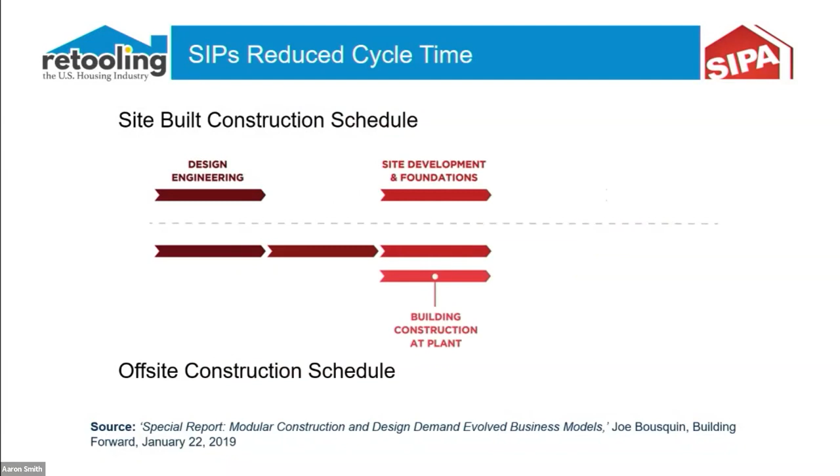When we do a normal construction, we have the design engineering. It's the same if you use something like SIPs. And then you start the construction process. You do the foundation. When you're doing normal site build, you can only build a foundation and you can't build the enclosure. But while you're building the foundation, you can also build your panels and have them ready to go. And then when they install, it's just assembly of panels versus all the construction you have to do with site build. So it's less time. And then you have hardly any site restoration to do compared with field construction.

So let's say that's 16 days of savings. $500 to $800 a day is the average carrying cost for a builder for every day the home sits and can't be sold. So that's about $8,000 to $13,000 of additional value cost savings just from time. When you get a bid package for SIPs versus a framing package, you have nothing in the line item that has that $8,000 to $13,000 in it. It's a completely different comparison when you look at all the costs.

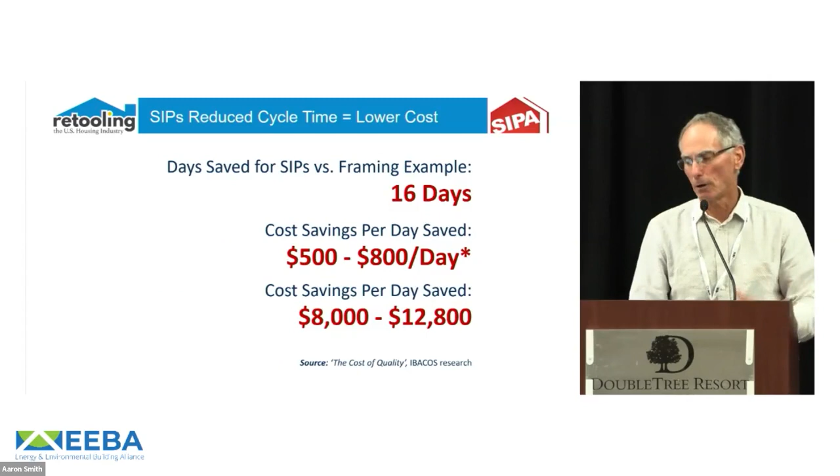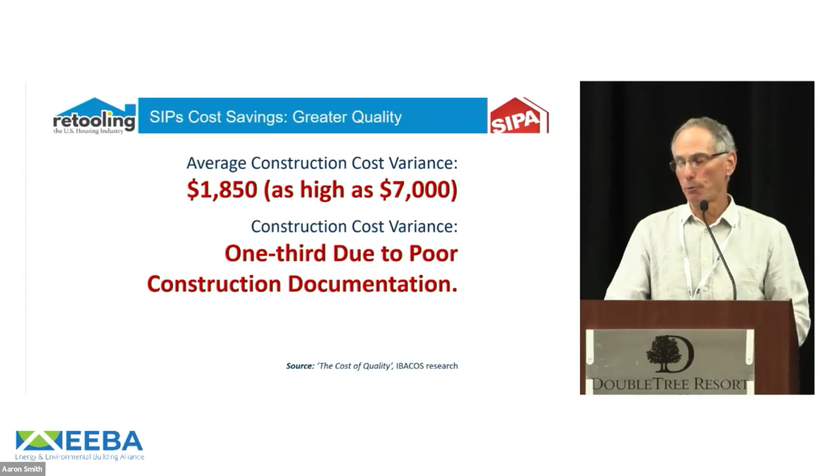The average cost variance for builders from an IBACOS study was almost $2,000 and as high as $7,000. And 1/3 of that was due to poor construction documentation. That risk almost goes away when you build with something like panelized construction and SIPs. You have all these extra warranty calls because you have less customer satisfaction in framed homes. And if I can reduce the average number of service requests from 15 down to 9, 6 fewer calls adds up to $1,500 of cost savings just on service calls.

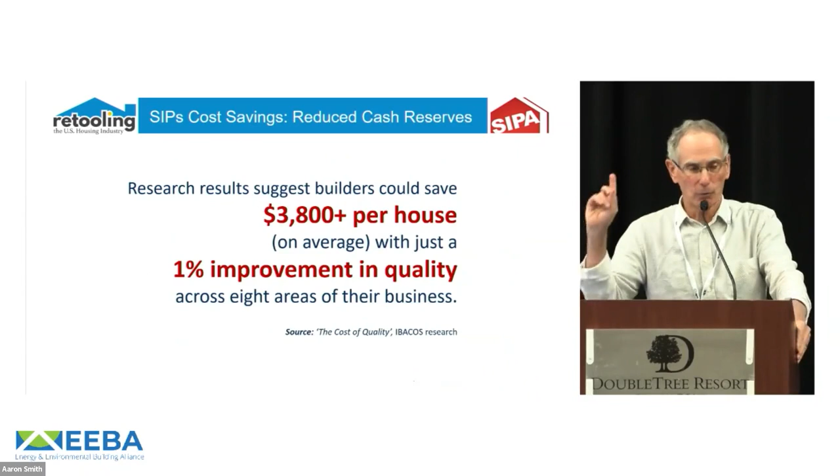And on cash reserves, the average builder keeps almost $4,000 per house. You could save $4,000 per house with just a 1% improvement in quality. I'm going to easily suggest that the improvement in quality with all the inherent advantages of the panelized construction could be 3, 4, 5%. So now we're talking 12 to 20,000 savings there.

And so then there's just the aggravation and risk working with trades. Think of all the trades that go away when you use SIP panels. You have exterior framing you don't need. Many manufacturers will also do the interior framing and the exterior framing. The insulation contractor goes away. The air barrier contractor work goes away. The air sealing work goes away.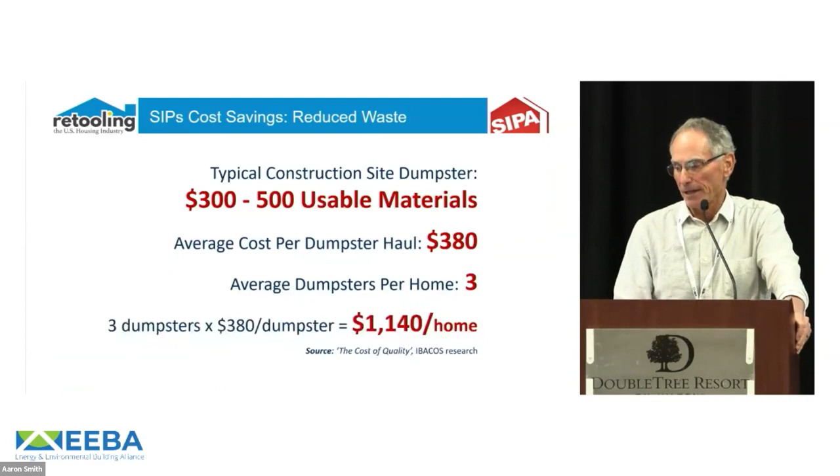And the trade work that's reduced: the interior framing, the drywall I mentioned because of all the savings on the exterior walls, the finishes with absolutely dimensionally accurate wall systems that require less rework and adjusting. So all those savings happen. And then the waste side, when I see construction bins like this on job sites, it's just frustrating how much waste there is. And if there are 3 dumpsters and it's $380 per dumpster, which these are older costs that have gotten much higher, that's over $1,000 of additional costs just to get rid of waste.

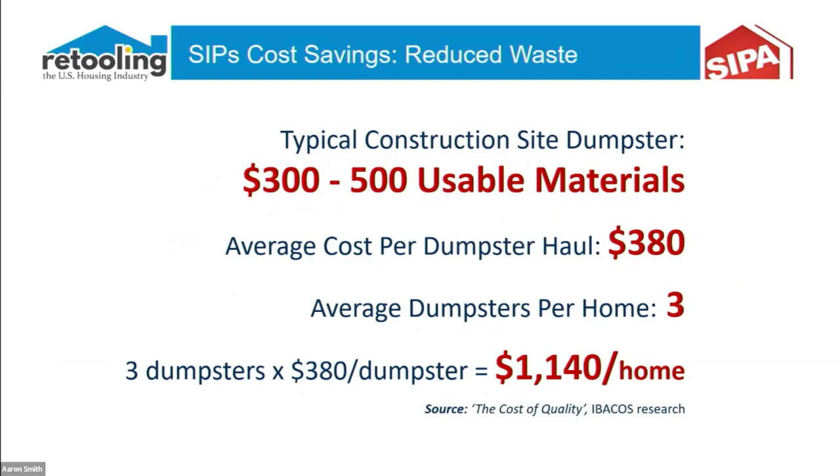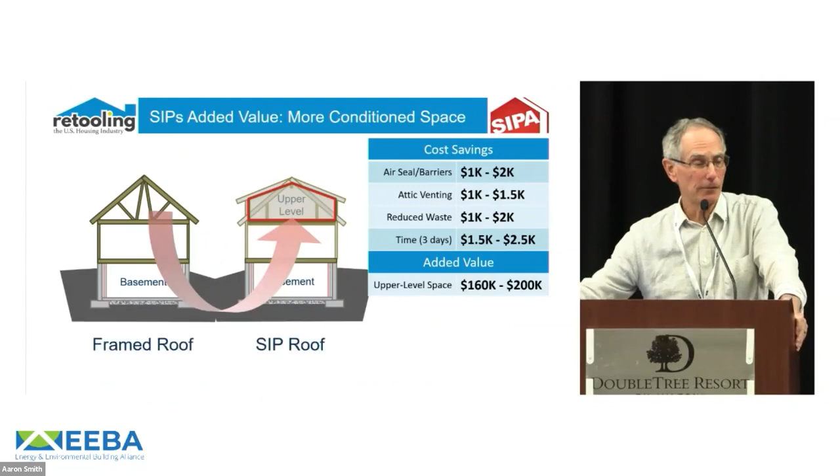And then the value of not having to do that attic ceiling interface. I don't have to do the air barriers, $1,000 to $2,000. I don't have to do the attic venting, $1,500. I have all the waste I mentioned, 1,000 or 2,000 that I save. And if I'm saving 3, 4, or 5 days, that's another $1,500 to $2,500.

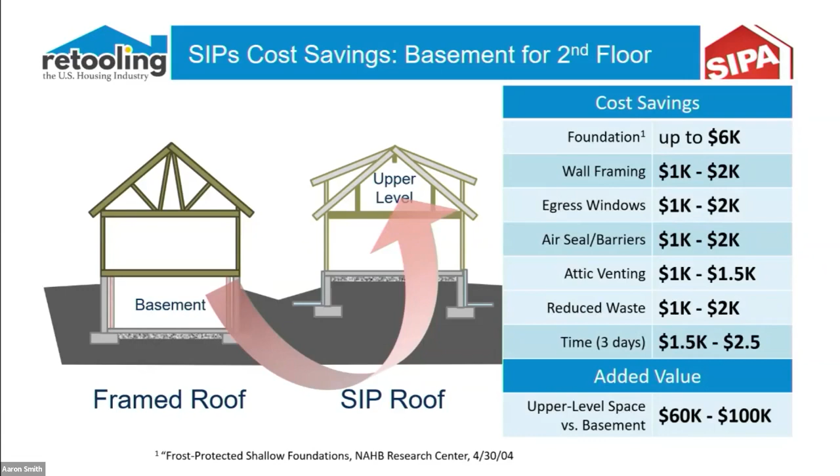Or I can actually trade off a basement with a shallow frost protected footing and capture that volume as the space that makes up for the basement. I trade off the basement for above grade space. And so again, I save all those costs on foundation, wall framing, air barriers, air sealing, attic venting, waste, time. And then I have maybe above grade space that's worth, let's say, $250, $300 a square foot compared to a below grade space that's worth $100 to $125 a square foot. So that's worth $60,000, $100,000 more.

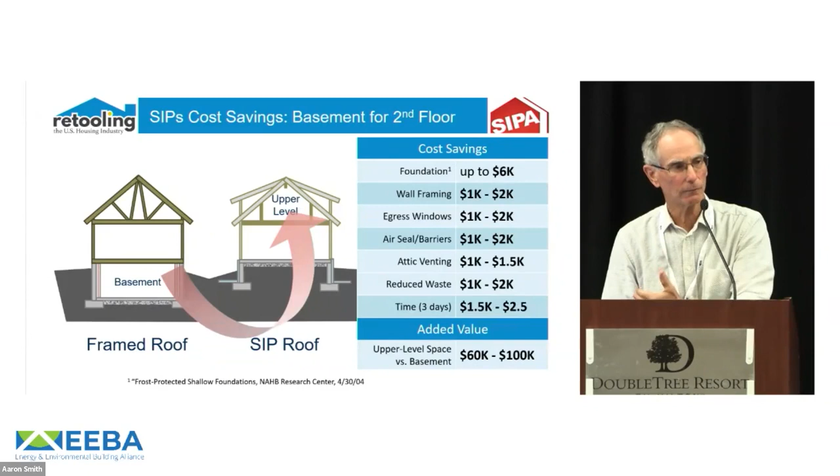It's really important that we think through completely the entire ledger of debits and credits with all the choices we make on the enclosure to get to our optimized choice for faster, better, cheaper. So why isn't this happening? So I want to talk about the innovation challenge.

How am I doing on time, Jack? Oh, how much? 14 minutes. Okay, I want to get to Jack, but

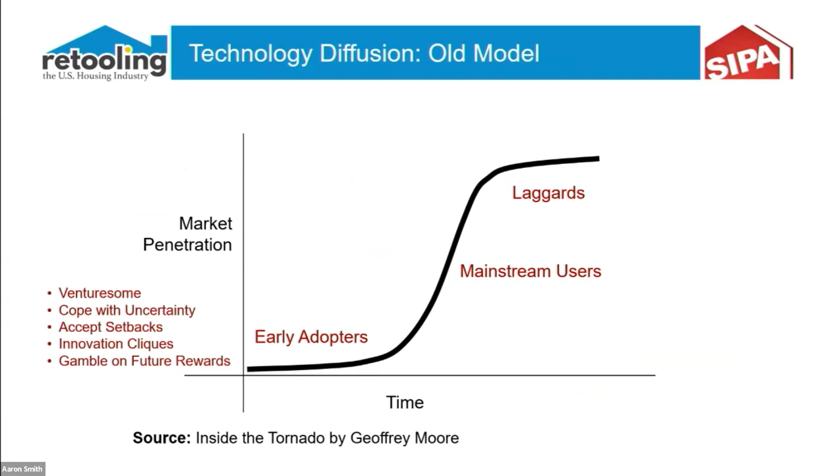essentially, I want to just explain the challenge is essentially this. Everyone thinks this is the market diffusion curve, and this is a myth. You go very smoothly from early adopters to mainstream users, and then you have the laggards that finally come along and embrace innovation. In fact, there's a reason why. The early adopters do adopt. They're venturesome. They're willing to take on change. They cope with uncertainty. They don't worry about setbacks. They'll figure it out. They form innovation cliques, and they're excited to kind of figure out the challenges.

And they're really willing to gamble on the future rewards, whereas the mainstream users, not so much. They are very discrete in their use of new ideas. You gotta prove it to me. You need very extended deliberation. They resist uncertainty. They only do proven solutions and whole products. That sound like a lot of builders, you know?

And then you have this chasm, which is the reality. You don't smoothly go from the early adopters to the mainstream users. It's so hard to go because they're a completely different audience and a completely different sales process. And so when you don't cross the chasm, you go flat. Think geothermal, think SIPs, lots of new innovations don't make it across the chasm.

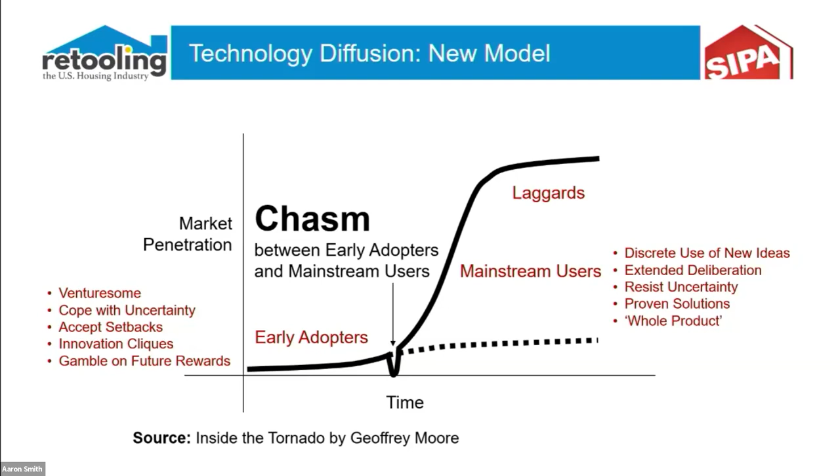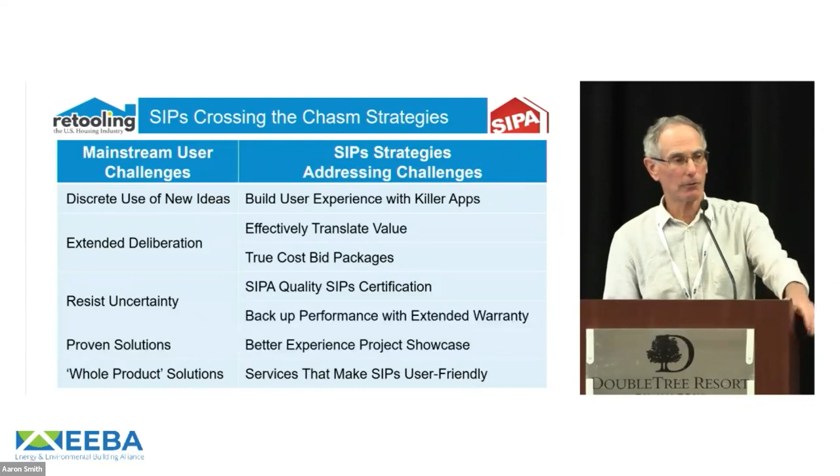And so what we've been proposing with SIPA and the board and all the members is a comprehensive strategy for addressing all those challenges with the mainstream users. The one I want to focus on is this true cost bid package, and I'll hand off to Jack. I'm going to skip this.

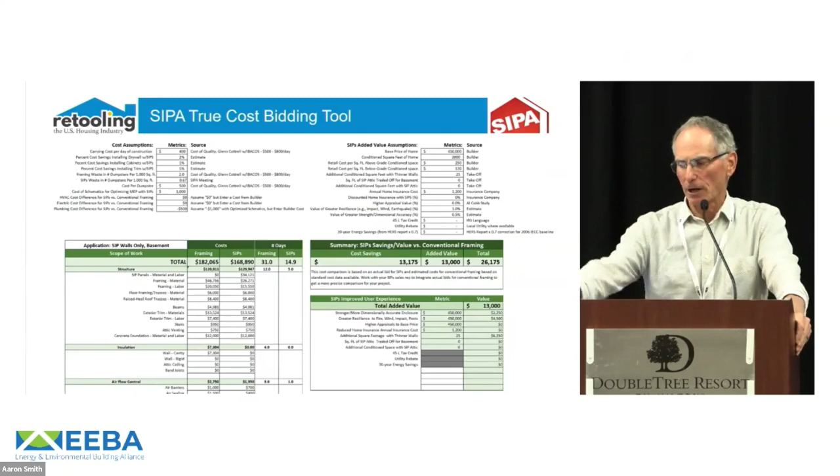So the true cost bidding package, what we did is just take that faster, better, cheaper. FYI, there's some printouts of this up here on the front table. If you can't see this, you can download it from the website. But if you need some visual help, there's some copies. And all I want to show you is in the upper left, you have cost assumptions that are laid out that drive the analytics for how you get true cost.

And on the right are the value assumptions that drive the analytics for how you get value calculations. The idea would be this would be a cover sheet to any bid a SIP provider would give that would help provide a comparison to the framing package bid that will be coming from someone else. Get ahead of the fact that the builder will be in shock seeing the higher maybe SIP price compared to the framing package. And then the calculations below are done automatically when you put in certain information.

What I want to really get to before I hand off to Jack is that when I took an actual bid that one builder got and gave me for a SIP package and a framing package, and I just took the package as it was given and put it in the tool, SIPs was almost $2,000 more expensive. Then I ran the tool where I accounted for time. I accounted for less risk. I accounted for less work with the drywall. I accounted for less work with the trimming.

We added all these factors in, and if the builder doesn't agree with the amount of savings, you can in real time make any changes and do adjustments. But what happened is instead of being almost $2,000 higher cost, it wound up that the cost for SIPs was over $13,000 less, and the added value added up to 13. So the total benefit to the builder was over $26,000.

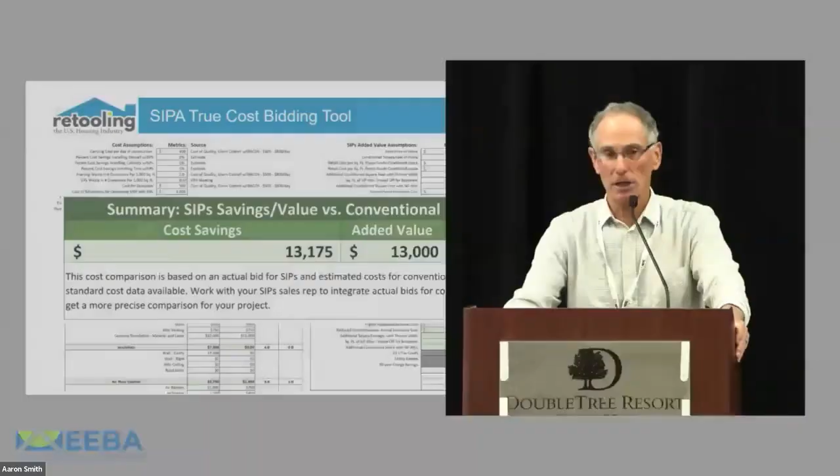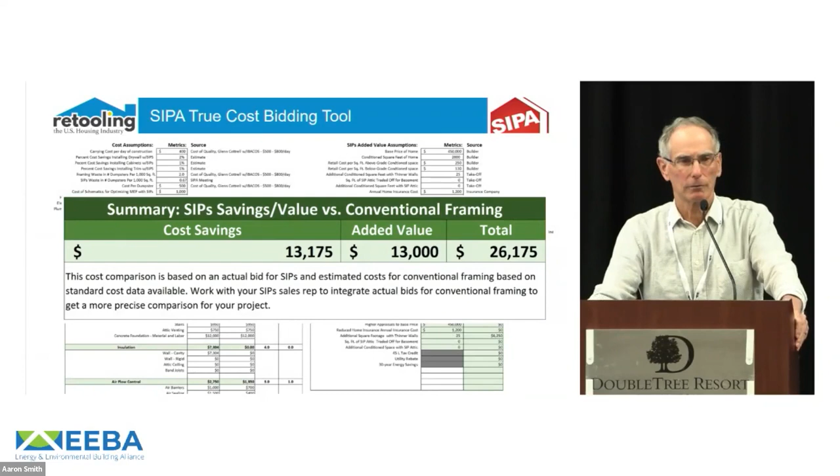All the costs that you and I pay that are not counted in a gallon of gas or a ton of coal or 1 million cubic feet of natural gas are shocking. I mean, natural gas fracking is destroying how many billions of gallons of potable water? Where's that cost factored into the cost of gas? So he was saying we have to reduce the cost of renewables. No, we have to do true cost accounting. And then renewables will be insanely more cost effective. But this is the same thing taken down to a very much lower level. I'm going to let Jack now introduce the state of the SIPs.

Thank you, Sam. I appreciate that. So really, real quickly, and once again, for those of you that are interested, I know it's an eye chart. There are some little copies up here on the front table if you wanted to get a summary sheet of how the iterative tool works. A little bit of discussion too about the tool. You can go to sips.org, you can download it from our digital resources, and have the permutations yourself.

We're in the process of making an online app. So you'll be able to put in your cost solution for whatever wall assembly you use, and then compare that to a SIP assembly and have some real time discussion there. What we really encourage you to do, though, is not necessarily do it on your own. We have 3 or 4 SIP manufacturers here today, whether it's Extreme Panel or Energy Panel Structures or Intercept. So the idea is to sit with one of them and they can help compare one to the other where the savings are. So you don't have to believe us, you can use your own numbers.

But with that in mind, the big green one. Just real quickly about where you can get more resources on this. So the Structural Insulated Panel Association, SIPA, is an association similar to EEBA. We've not been around quite as long as EEBA. I think EEBA is around 5 years longer than SIPA, but 1990, and essentially it's the organization of all the manufacturers.

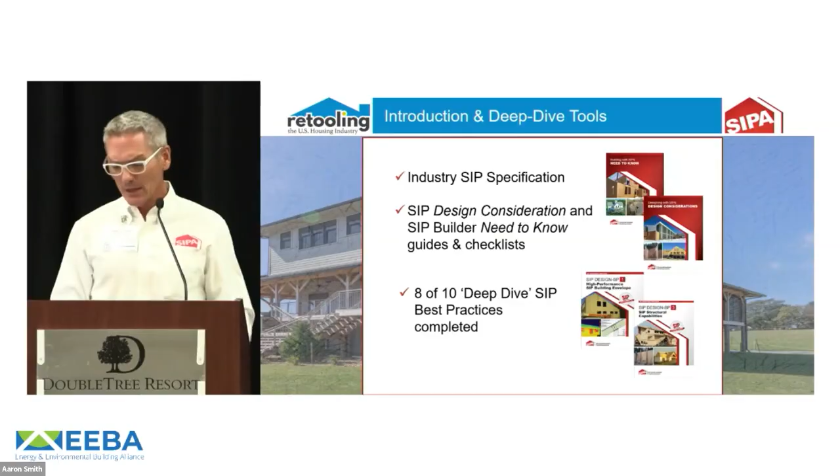What we've done from there, as you can see on the bottom part of this slide, is we've taken each of those chapters and we've done a deep dive. And so if you want to get into the geeky building science of how do you do HVAC with SIPs, we got a 12-page brochure for you. If you want to know how do you do electrical with SIPs, we got about a 6-page brochure for you. If you want to know how to do just high performance building enclosures, there's a brochure for that. So you can step your way through and go further.

And resources essentially is just topically where you can find things like, well, what about SIPs with seismic? Well, what about SIPs with fire? Well, what about SIPs with termites? All that data is there. Sustainability information, life cycle information, all that's available for you. Additionally, under resources is the education piece.

And we call it the BEST training program, Building Education with SIPs Training. And so you can actually go through 10 1-hour little videos by a gentleman named Al Cobb. And they're AIA certified. You can get health safety welfare credits with them. But if you take all 10 courses, you take all of the 10 little tests, you can become a registered SIP builder. And then once you actually build a SIP project, get it HERS rated, get it indoor air quality tested and blower door tested and show that you can meet the requirements, then you can become a master builder. And so that's available for you there as well.